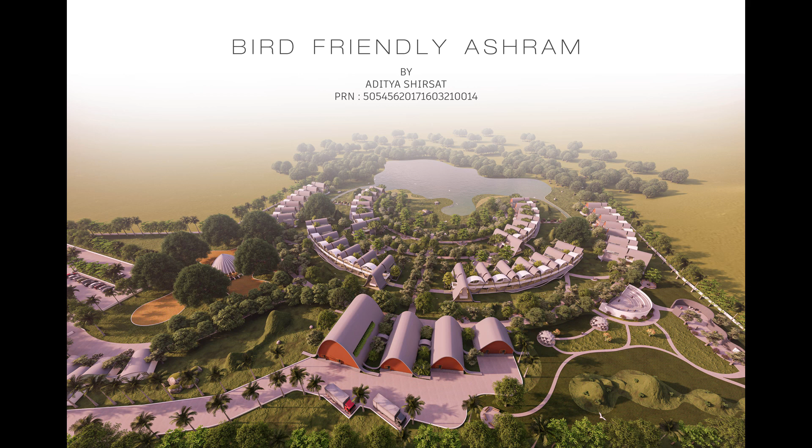Design typology is bird-friendly ashram, which comes under Unified DCPR Old Age Home clause number 4.11.15.

Site location: the site is in Nasik, near Pandavleni Caves. Area of the site is 51,139 square meters. East-west side slope is 7 meters and north-south slope is 4 meters. The site is connected to the Nehru Udyan, which comes under the Forest Department, which has an existing water body. These are some attraction points near the site.

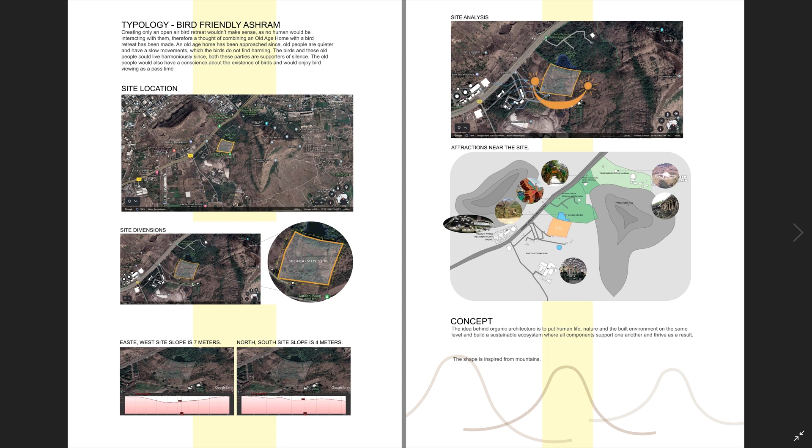Concept: the concept is inspired from the mountain, to maintain the natural skyline of the area.

Master plan. This is the main entrance to the site, the watchman's cabin, and parking, with capacity for 28 four-wheelers and 186 two-wheelers. This is the main pedestrian entrance to the ashram, leading to the admin office, reception and waiting area.

This is the yoga dome surrounded by desho grass. This is the multi-purpose hall with dining, kitchen, storeroom and laundry room. This is the garden with amphitheater and art and exhibition area.

These are the six-room units; each unit has 14 rooms of double occupancy. These units are interconnected with pathways. These are the outdoor seatings shaded with badam trees.

This is the jogging and walkway with dense vegetation. This is the extended water body with the birds' bathing area, and this is the vegetation scheme. All trees and plants are native.

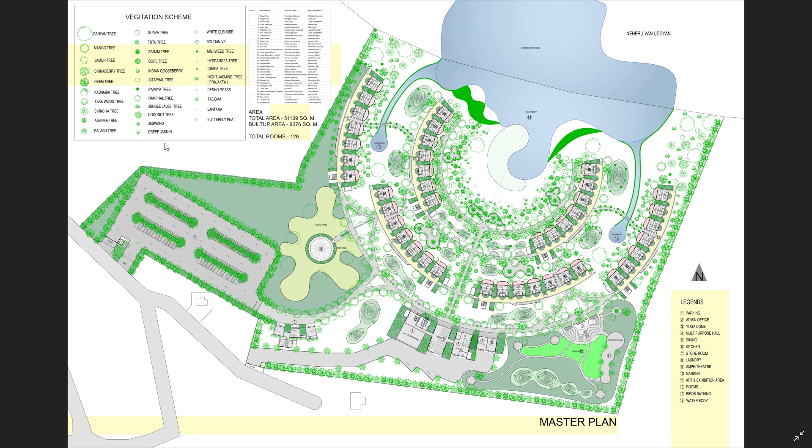Site sections. Section B-dash cuts through the yoga dome, rooms and water body. Section A-dash cuts through rooms and water body. Section CC cuts through the art gallery, amphitheater, rooms and water body. Section DD cuts through the dining area.

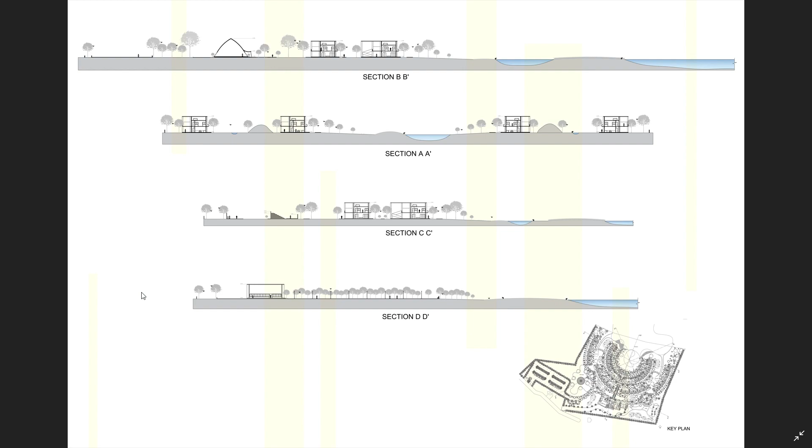Office: this is the reception area with waiting room, the admin office and manager's cabin with attached toilet, and these are the common toilets. This is the isometric view, section, elevation and 3D visuals.

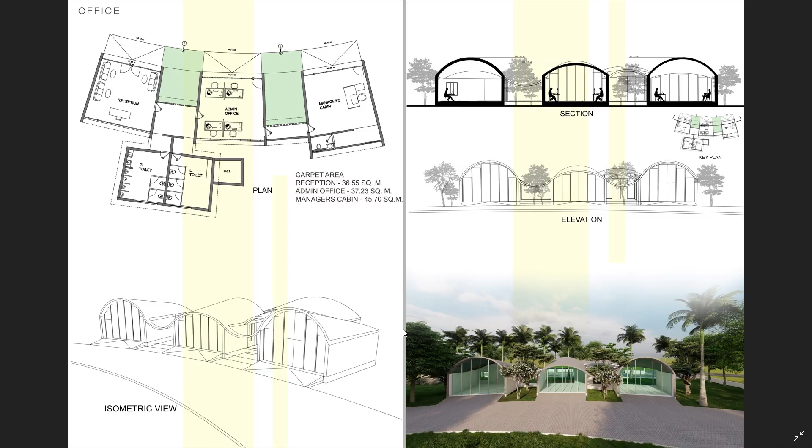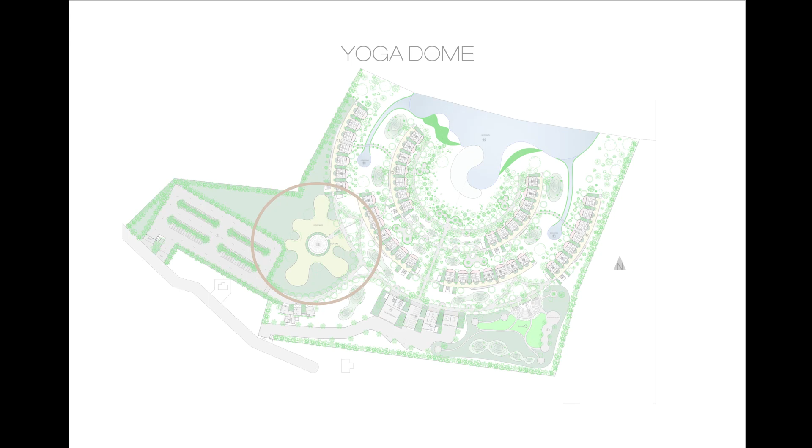Yoga dome: the yoga dome is surrounded by desho grass with a plantation of bougainvillea, hydrangea and butterfly pea. This is the isometric view, section, elevation and 3D visuals of the yoga dome.

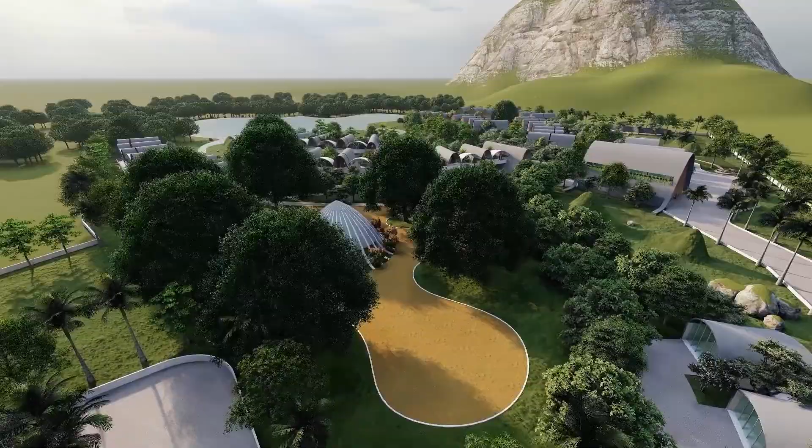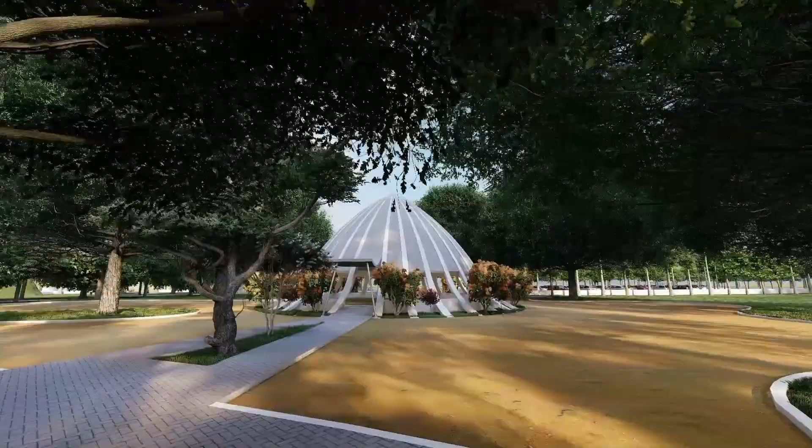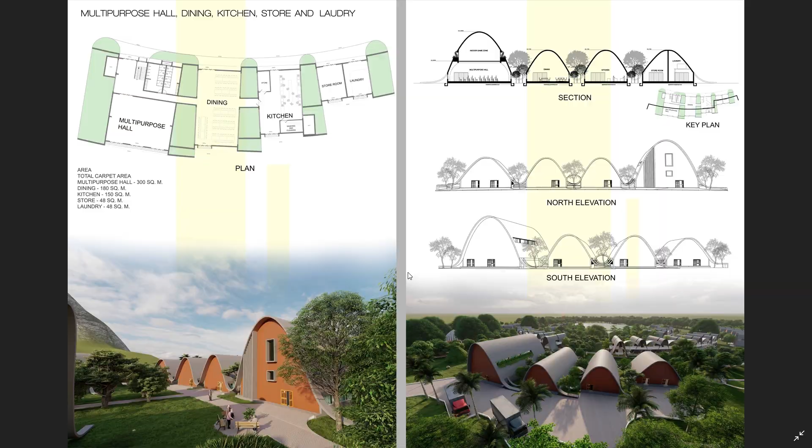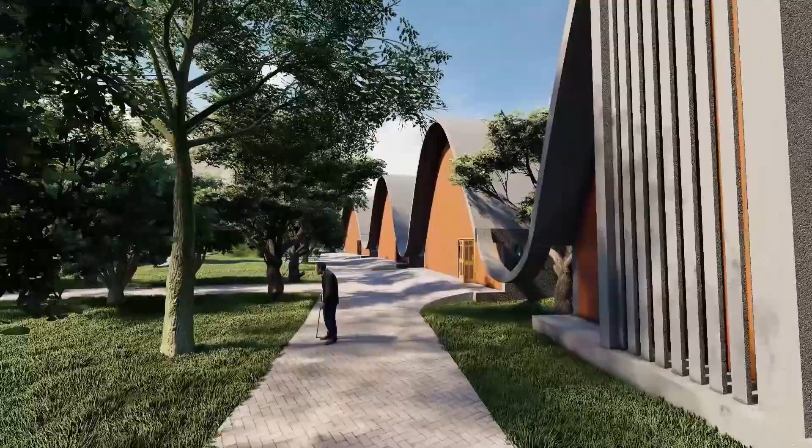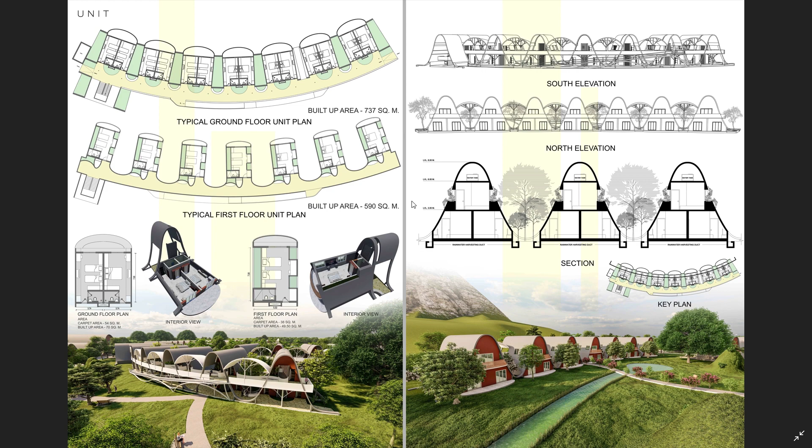These are the rainwater harvesting ducts connected to the water body. There is a plantation of Wagnaki creeper which will cover the entire roof and merge with the context. These are the 3D visuals.